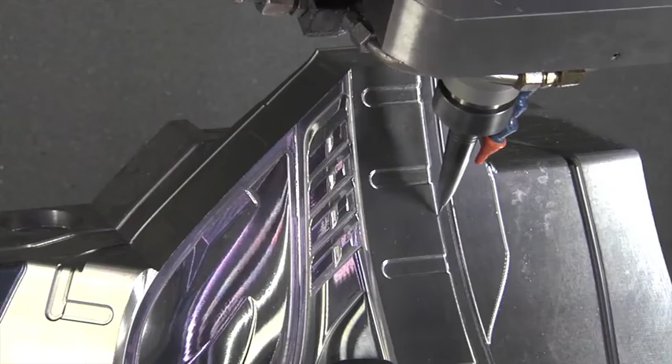Autodesk PowerShape is the ideal modelling companion for CAM software such as PowerMill or FeatureCAM, allowing you to create the complex 3D geometry that you need to control your multi-axis or high-speed machine tools.

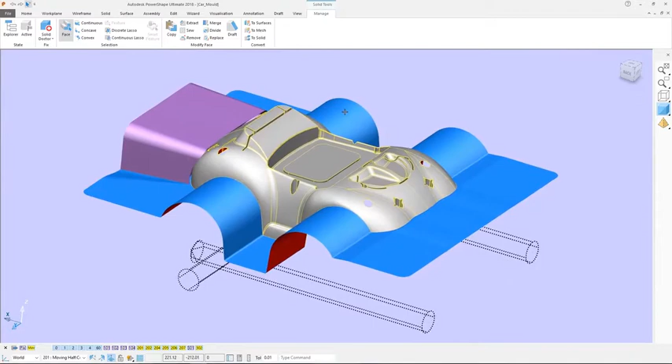PowerShape operates on 3D data regardless of which system created it, and no matter what format: solids, surfaces, wireframe, even meshes. Once imported, intelligent analysis tools automatically detect and repair critical faults that could complicate downstream processes.

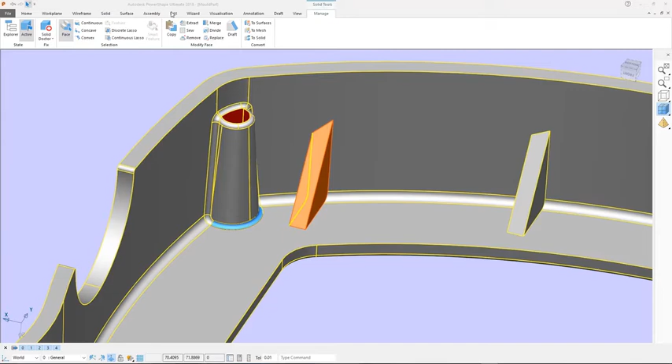Unlike many CAD systems, PowerShape does not insist on you fully repairing a solid before you can do any further work. Many commands, including powerful direct modelling tools, still work even on faulty solids.

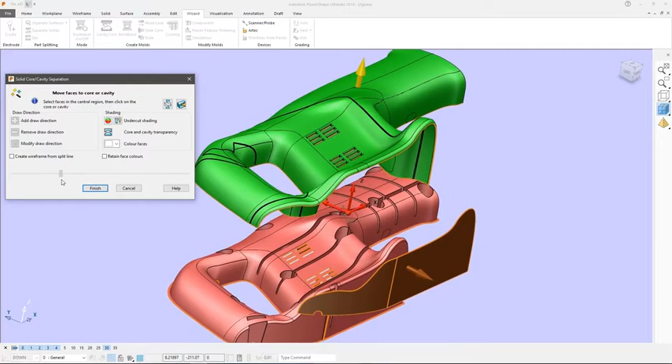When creating cavities, cores and slides from a 3D part, PowerShape guides you through an easy-to-use wizard. In most cases, the shutouts and split faces are created fully automatically, leaving you with minimal work to do to create the finished mould.

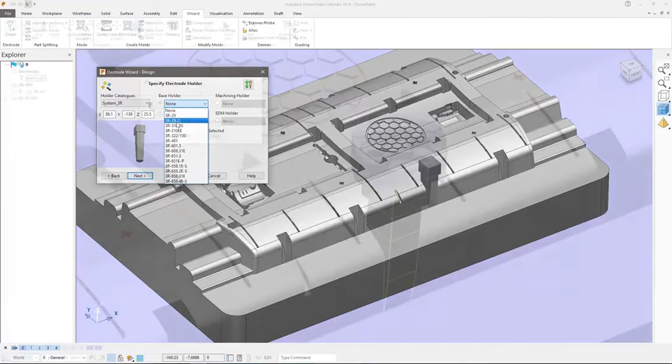To further support the production of moulds and dies, PowerShape contains dedicated tools to assist in the design and manufacture of electrodes for electrical discharge machining, or EDM. Wizards guide you through the entire process, from design through to machining, and even to driving the EDM hardware itself, eliminating costly errors and saving you time.

PowerShape: import, analyze, fix and prepare complex models for manufacture.